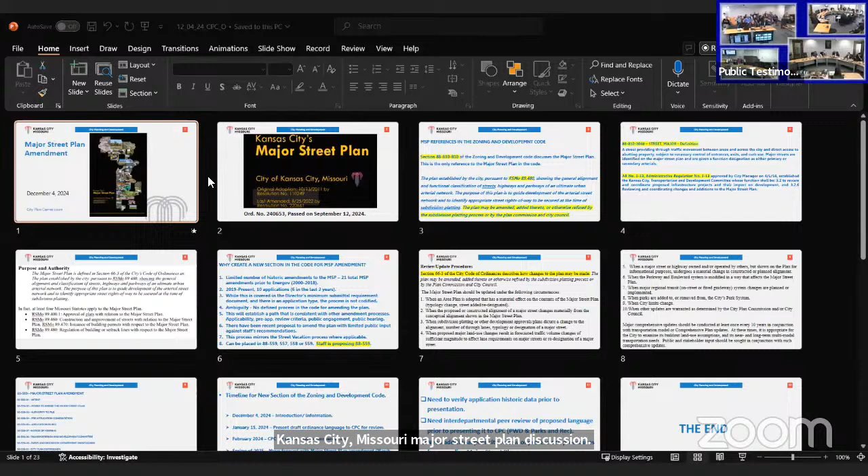Thank you, Sarah. Can you see my screen? There you go. Good morning, Mr. Chairman, members of the Plan Commission, Olafo Agbaji, City Plan and Development Department.

Over the last several years, especially since last year, we've had challenges with the major street plan amendment and various cases that come before you. And as we've stated, there's no process or procedure in the code. So today we're going to give you a quick presentation on what the city, which is DMD and City Plan and Development, wants to do to create a process and procedure for amending the major street plan.

During our prior discussion, you also remember that we had talked about revamping the major street plan, and Public Works is here to give you some information about that. I'm going to give you information on establishing a process and procedure for amending it as we move forward, and they will give you just a brief nugget on what they've been doing and where we're going with that.

So for what I do, I'll start with the first thing. The current major street plan was last amended in full back in 2011 and briefly amended last September for the deletion of Tiffany Springs Parkway. So since 2011, we are due for another amendment.

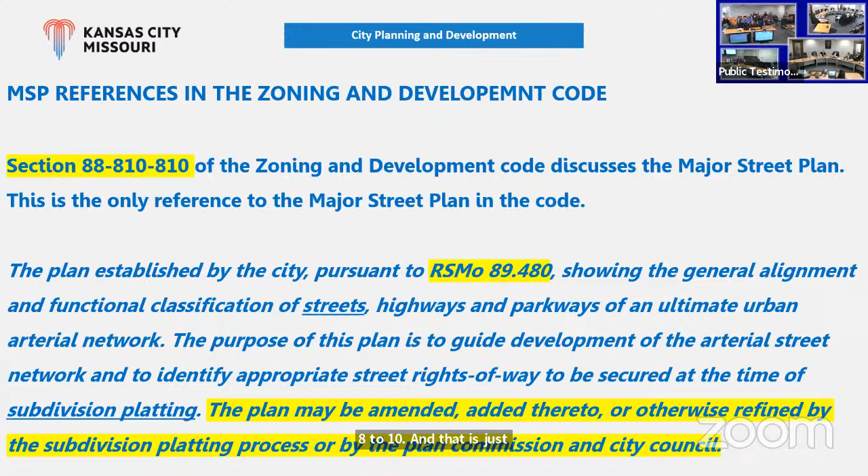Again, when I presented my prior presentation, I informed you that there is no process in the code. There's no mention. The only mention in the code about the major street plan is a reference in 88-810, and that is just referencing the major street plan, telling you that based on RSMo 89-480, you can do it.

City Plan Commission and City Council can do it. We have a definition of the major street plan in the code, and there's an administrative regulation by the city manager that requires that every major street plan goes to the Transportation and Development Committee. Those are the only policies we have that reference the major street plan.

Again, the purpose and authority that's currently in the major street plan document itself still references the same RSMo 89-480. That's the only mention of it. And then there are other state statutes that refer to the major street plan without giving us explicit direction on how to do it, when to do it, or why to do it.

Just to have a brief discussion topic, which is why we'd create a new section in the code to talk about major street plans. So over the past year, as I was doing this, I went through and checked to see how many major street plan amendments have been applied for. Prior to the compass system, I think we had a total of 21. From 2000 to 2018, we had 21 major street plan applications, and not all of them were approved. So when I come back, I'll give you the data in terms of how many were approved and how many just fell apart.

Between 2019 and today, we had 10 applications, which is after the compass system. And of those, we had 6 of them in the last 2 years, which is why we get into what we're trying to do today.

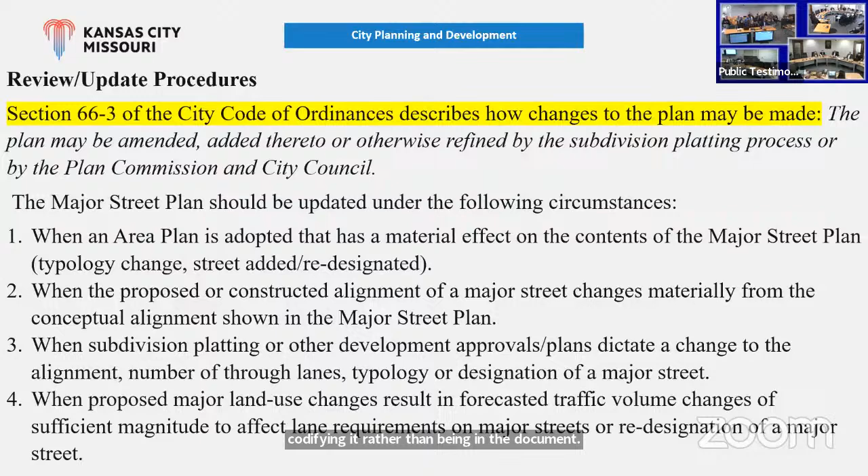Currently in the major street plan, these are some of the criteria to consider when you are trying to amend the major street plan, but it's not in the code. So when I come back, these are some of the criteria we will use within the new process, codifying it rather than it being in the document. So this will be the process we will use, and I'm not going to go through all of them. So it goes down to 10.

In the code, simply put, I'm going to be using these sections. Let me make sure I go through this. So the new section will be major street plan. We'll know what the intent of the major street plan is. We'll also define the power to amend the major street plan clearly, and the authority to file, who can file, and when they can file.

It will require pre-application consultation prior to filing. Then you have filed a major application. Notice of hearing will be required as we do with other processes. We would then refer that to the Transportation and Development Committee. We will also refer to the Parks and Rec Department if it's on the Boulevard or Parkway. After that it will come to City Plan Commission, who will then make a recommendation to the City Council, who will review and give final action.

We will also include approval criteria that will evaluate the proposed amendment prior to making our recommendation. So with that, I'm looking at a timeline for getting this moving forward.

Today's action was introducing this to you. The next action will be to bring this to you either January 15th or the first week in February. I'll present the draft language for City Plan Commission to go through. Following that, you would then come back, probably the second week in February, to review and then make a recommendation on that ordinance language to go to City Council. And then we will move forward.

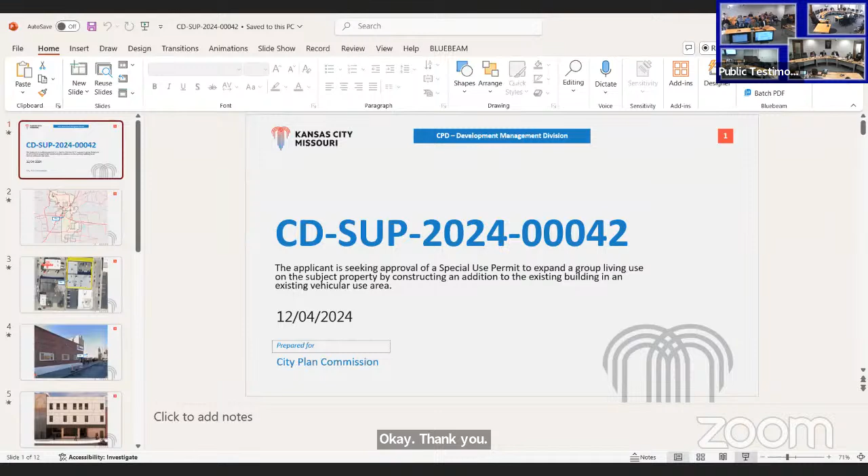Thank you. Can you hear me and see my screen all right? We can see your screen and hear you. Yes, thank you. Perfect. Thank you. Okay, Ahnna Nanoski, Development Management Division, as mentioned, this is CD SUP 2024-42, and the applicant is seeking approval of a special use permit to expand a group living use on the subject property by constructing an addition to an existing building in an existing vehicular use area.

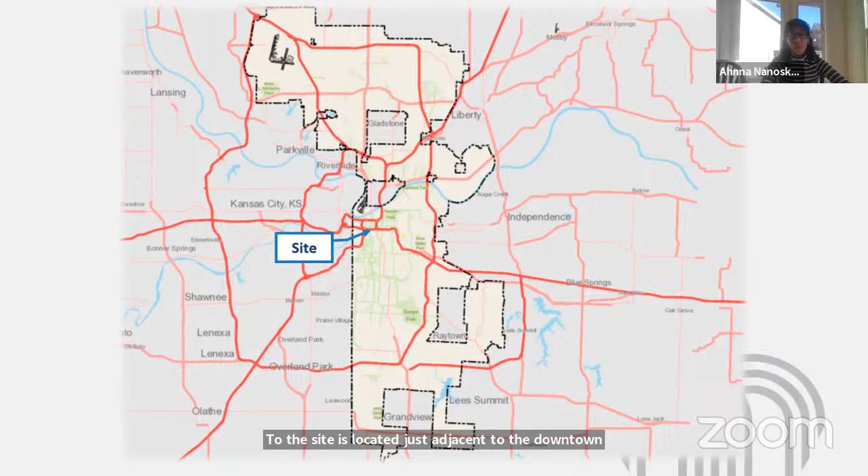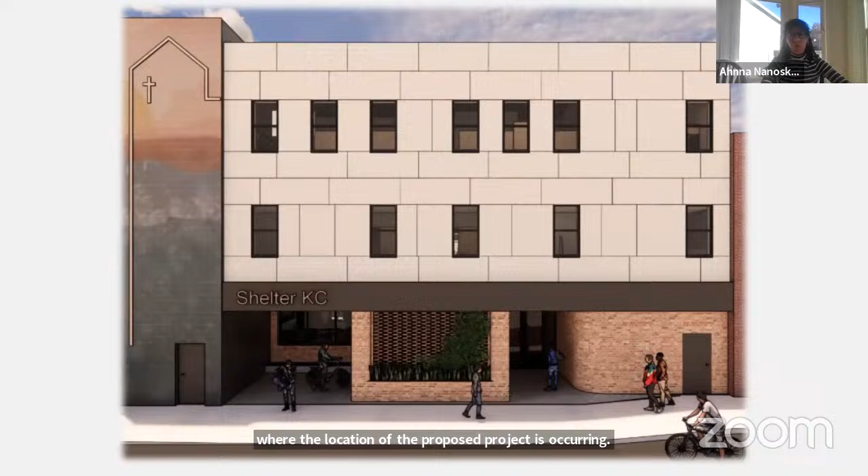We have a rendering of what the building will look like, provided by the applicant, and another look at the site plan. The existing vehicular use area will be completely filled up with this addition, which expands the group living use that currently exists in the two existing buildings to the north and south.

The review criteria associated with the special use permit is on the screen. I'm not going to go over all the items, just the three criteria that showcase city staff's recommendation. First is review criteria B: will the project be in the public interest and not have significant adverse impacts on the surrounding community?

We believe a mixture of residential uses is important for a large community like Kansas City, Missouri. Additionally, a group living use in downtown or downtown-adjacent neighborhoods, close to where there are lots of vulnerable populations, is good for those uses to be there.

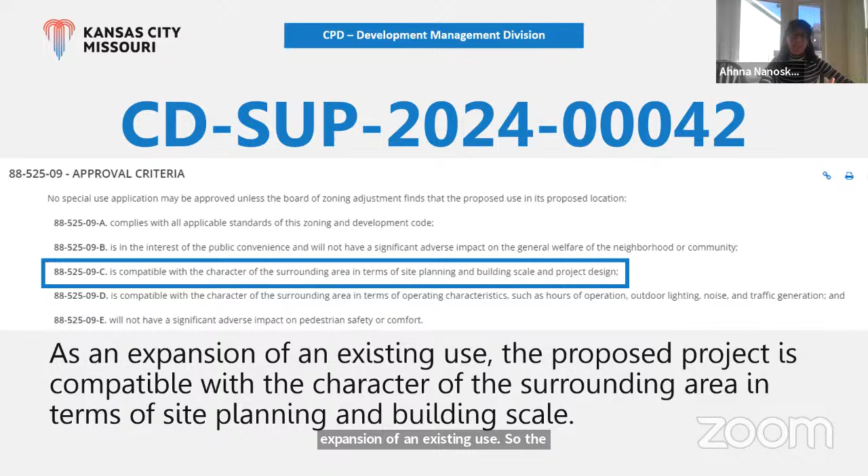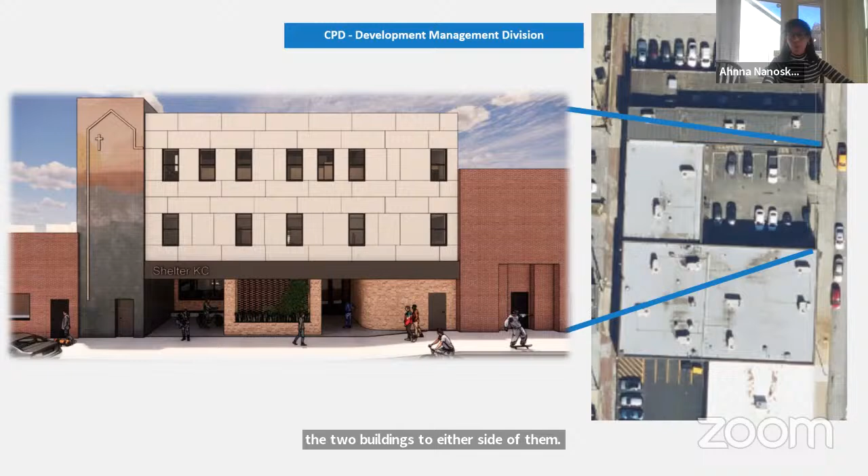Review criteria C: is the proposed project compatible with the character of the neighborhood in terms of site planning, building scale, and project design? As mentioned before, this is just an expansion of an existing use, so the proposed project is compatible with existing conditions. We see the addition in context with the two buildings on either side. They're infilling it, and the design is compatible with what is there now.

Review criteria D talks about the operational characteristics of the project and whether that is compatible with the surrounding area. Again, it's just the expansion of an existing use, so we don't believe it will substantially affect the surrounding area.

The proposal includes an addition to accommodate dwelling units that will hold around 24 additional people, along with some amenities like a small courtyard. We think that addition is minimal in terms of the scale of the project and how many additional people will be held in this addition.

So city staff recommend approval subject to condition, and condition number 5 does need to be resolved prior to the BZA review. I know the client is working with the Water Services Department currently to fix that issue. That concludes my staff report. I'll be happy to answer any questions.

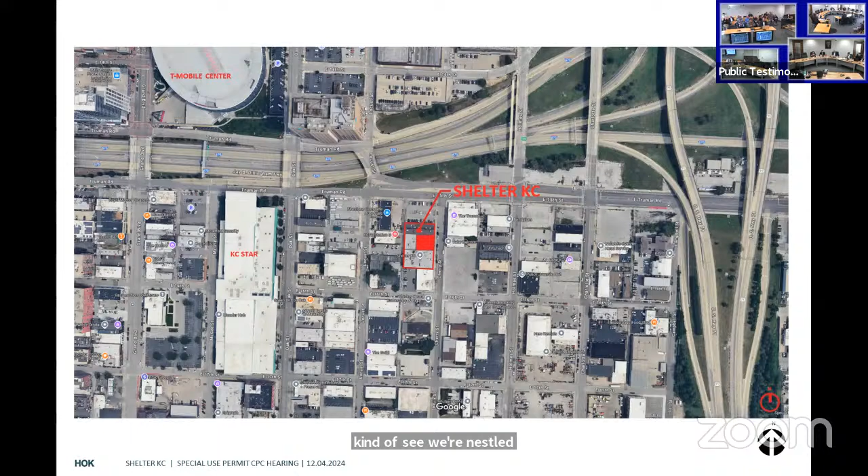Like Anna said, we're located in the East Crossroads, just south of Truman Road. We're nestled between 71, 670, and the KC Star building, right over in that area that's developing.

What we're really trying to do here is create a new front door for the Shelter KC facility that will allow us to have an upgraded set of amenity spaces that give them better tools to support their guests and staff. We want to focus on the whole person and give a restful space for the guests as they transition back into the public realm.

We've been thinking really about what are basic human rights, what makes a person well, what should a shelter provide. Those have been questions we've been asking ourselves along the way as we've been designing the project, really trying to support Shelter KC and their mission in the East Crossroads.

I'll just go through some imagery. Like Anna shared, this is the primary elevation of the building off of Cherry Street. You can see we've tried to integrate the different textures of the crossroads with matching brick and some updated paneling.

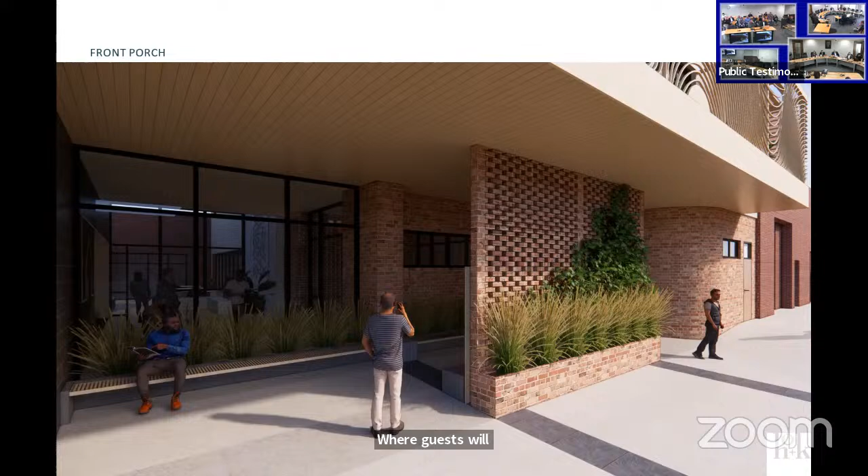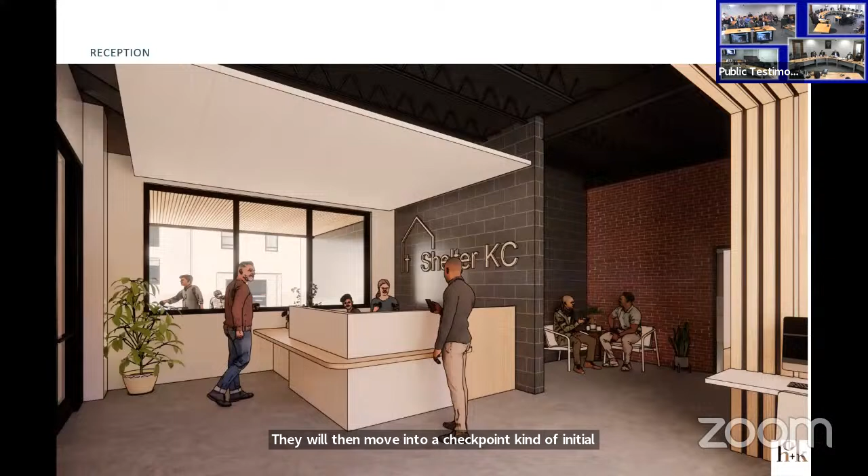Including artwork and signage in the facility to really mesh with what's going on. This is a view of the porch, which is also a controlled queuing area where guests will queue at certain hours of the day to get entered into the facility. They'll then move into a checkpoint, an initial intake and reception area that will be staffed 24/7 and have great views to the exterior with both direct windows and security cameras.

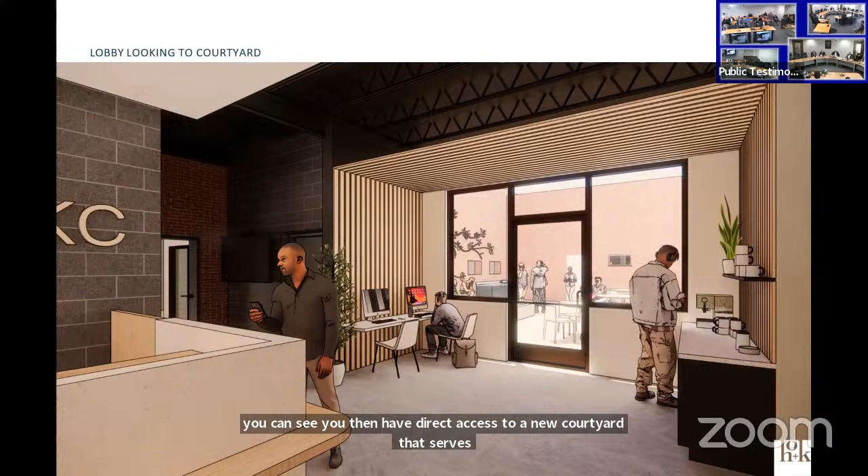You then have direct access to a new courtyard that serves the guests and staff and creates an ancillary waiting space and public use for folks in the building. And this is that space, really just meant to be a quiet rest space that could also transform for a small staff event or something like that.

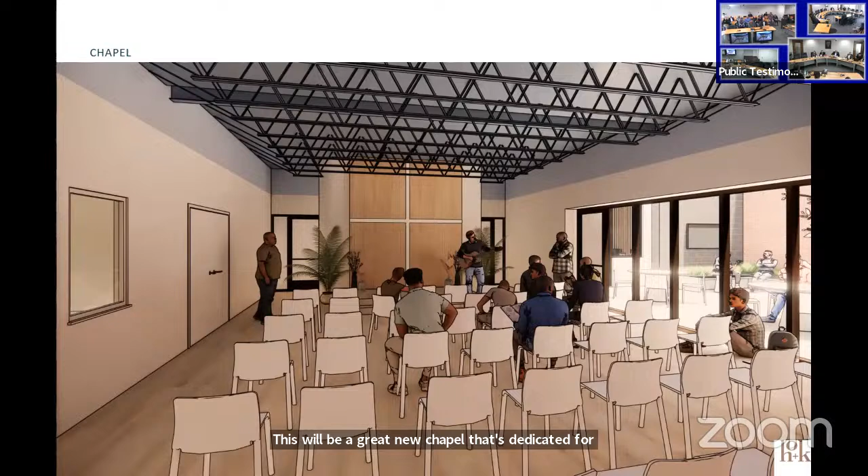Immediately behind this is the chapel, and you can see the courtyard on the right. This is a new upgrade from their current facility, which is being used more as a multi-purpose room. This will be a great new chapel dedicated for that purpose, but with the ability to flex into a larger gathering as needed. Moving upstairs, we've created a few new living room spaces that serve the guests and create dedicated restful spaces rather than having to use multi-purpose areas.

Thank you for your time.

So there's a couple of different elements of Shelter KC. One is we are not a low barrier shelter. We basically give a 14-day stay, and after that you have to agree to be working a life plan or go into a Christ-centered recovery program. This new facility, the housing on the 3rd floor, is for people in a 9-month structured recovery program.

The other piece we're really excited about is that when we did our phase 1 renovation, we lost some of our common spaces, and we haven't had enough space for classrooms, lobbies, that entrance area, our own interior place—so that when people during the night want to go out, or maybe just need to have a smoke or whatever, we need that interior space. So those are the things we're really trying to focus on.

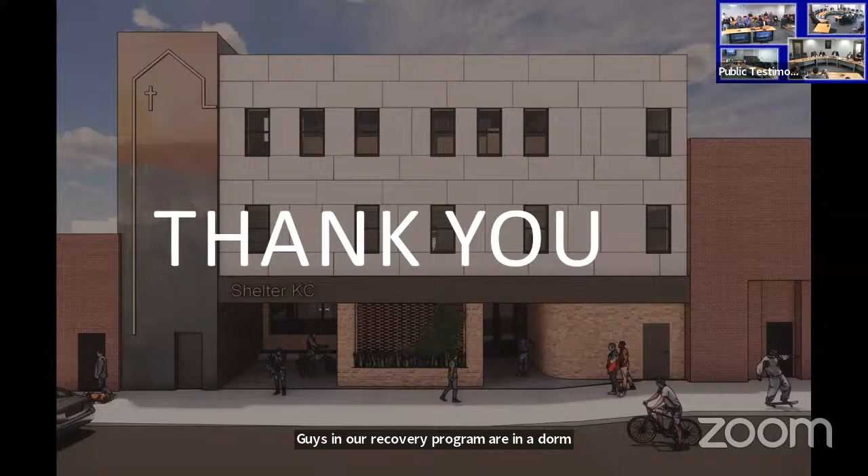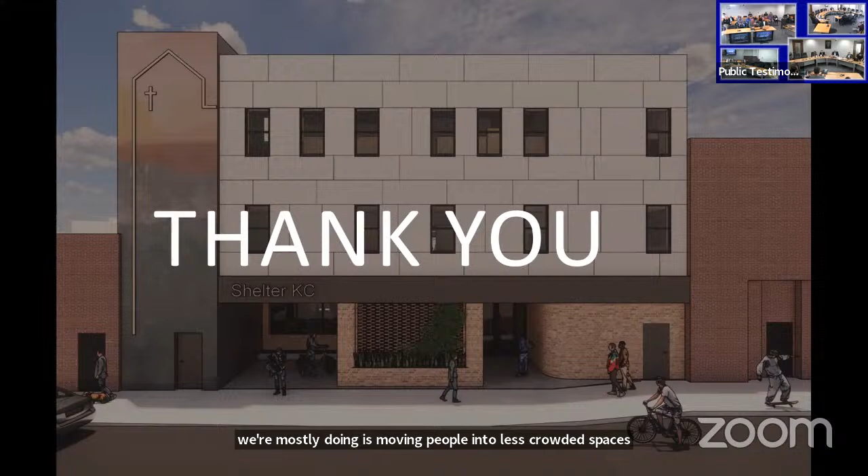Any questions from the commission? Can you talk about the capacity of the spaces that exist now and capacity with these new renovations? Yeah, we're at 124 currently and will continue to be at 124, because when we did our phase 1 renovations we moved some people into temporary spaces that'll go back. Right now our multi-purpose room is being used temporarily for housing. Guys in our recovery program are in a dorm meant for guests, and they'll move upstairs, while people in overflow will move into that space. So it's not adding any more beds to our existing space—what we're mostly doing is moving people into less crowded spaces and creating much more classroom, community space, and office space.

And do you provide services to people not staying overnight?

So pretty much you have folks staying with us. The 14-day guest program, those folks leave during the daytime and come back every evening. After that 14 days, you have to be working a plan. One of the things is that 60 to 70% of our overall clients are employed. Some are employed when they come, but the majority after those 14 days, we're working on getting them employment. So most people are working jobs, and the nighttime is when we're the busiest, because that's when everybody's in and we're working with people. In the daytime, most people are working.

I got a question for Ana. The special use permit, is that only for this new piece, or does it start the clock on the existing pieces and include this new piece?

It is only for this new piece. The reason why Nick mentioned the amendment to the special use permit is because when the use was first established, it was just allowed by right. But now in this zoning code, if it was to be established, it would require a special use permit. So anything beyond that existing nonconformity triggers the SUP.

What length of time is tied to this SUP? This one is tied to 5 years. Okay.

All right, any other questions for the applicant? All right, seeing none, let's open it up for public testimony.

Good morning, Mr. Chair, members of the Plan Commission. Jerry Riffle, Lathrop GPM, 2345 Grand, Kansas City, Missouri. To my right is Matt Abbott, president and CEO of Abbott Properties. Abbott Properties is a neighbor in many ways—it has developed and redeveloped many properties in the area, its national headquarters is in the area, and it leases properties to a number of neighbors. We have provided correspondence to the applicant, which we will make part of the record, but what we're requesting is simply that this be held 2 weeks so we can engage in 2 major activities: first, negotiate a neighborhood agreement, and second, explore their business and social plans.

According to the staff report, this is going to result in 24 additional residents in the area. As you know, there are specific requirements for a special use permit, and those requirements are well stated in case law for very good rational reasons. At the BZA hearing, they will have to show it is in the interest, as staff indicated, of the public convenience, and will not have a significant adverse impact on the general welfare of the neighborhood or community. In other words, it needs to be consistent with development patterns, public safety, and uses in the area, and compatible with the character of the surrounding area in terms of site planning, building scale, and project design. We want to be a good neighbor, and we want them to be a good neighbor. We think a 2-week hold to make sure we understand that is very reasonable.

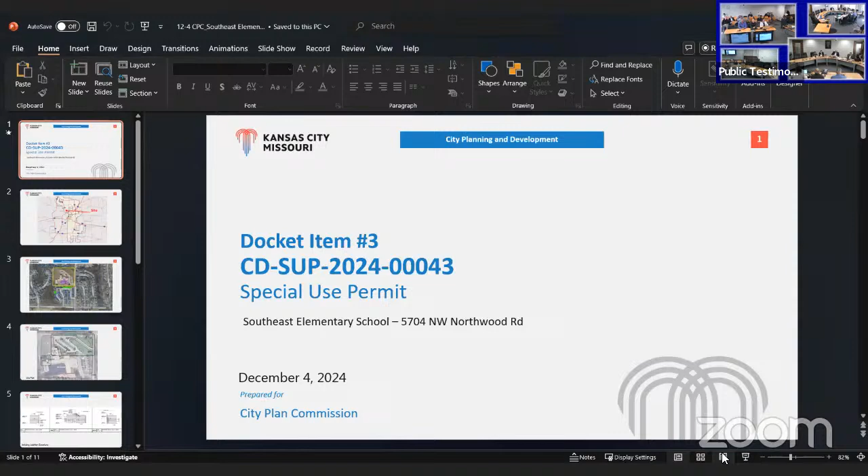The site plan reviewed by staff, as provided by the applicant, shows two areas of change to the existing school. The largest change will be the addition of a vehicular drive to the existing parking lot, which will be reconfigured as a parent drop-off and pickup area, separate from the bus drop-off and pickup. There will also be a building addition of just over 1,000 square feet on the west side of the building.

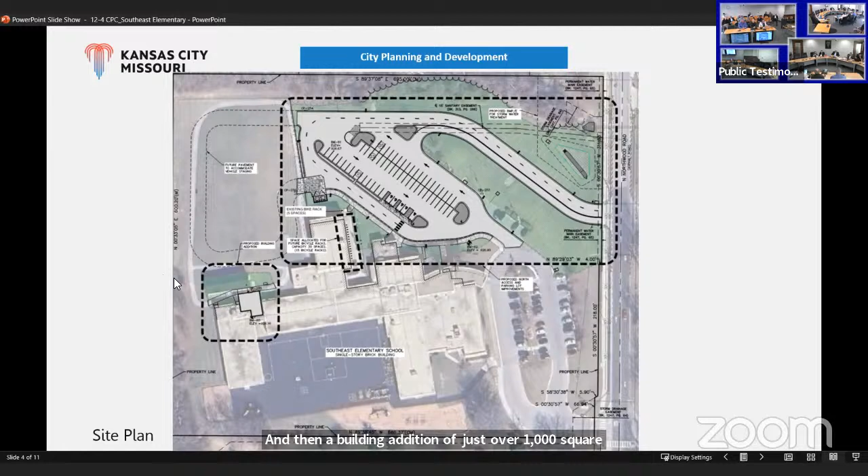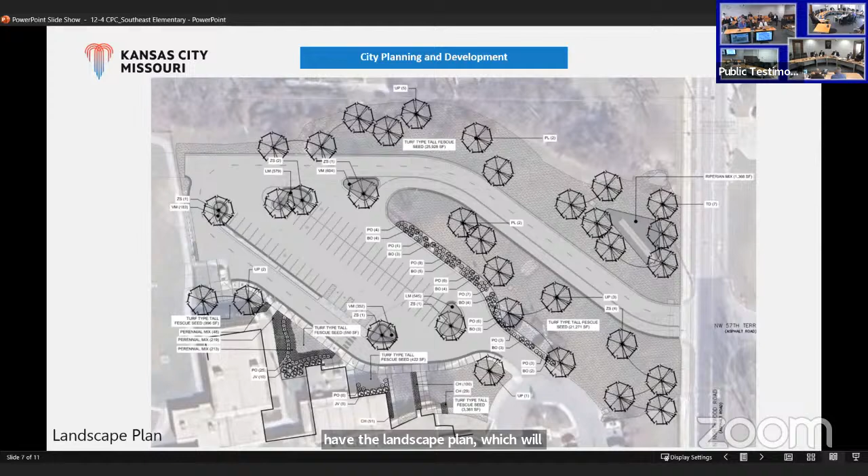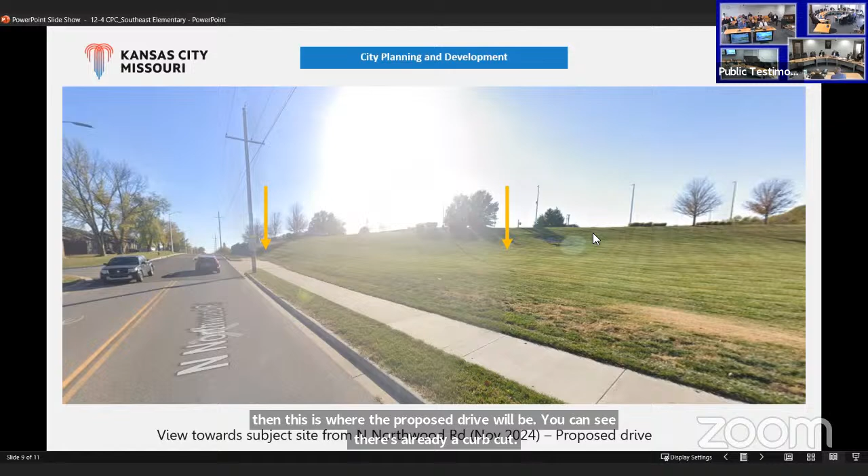We also have the landscape plan, which will provide screening of the parking area, and a few street views of the site. This is the existing drive located at the southern portion of the site, and this is where the proposed drive will be. You can see there's already a curb cut here, and it will wind up this hill to get to the parking area. Here's another view of the site looking straight on.

Staff is recommending approval subject to conditions. One condition will be for the applicant to seek a variance from the Board of Zoning Adjustment for the number of required bicycle parking spaces. I can take any questions.

Any questions from the commission to city staff? No. Okay, all right, welcome the applicant then.

Good morning. David Wood with Kaw Valley Engineering, civil engineer on the project. With me is Mr. Jim Rich with the Park Hill School District. I don't have a whole lot to add to Genevieve's presentation—she illustrated what we intend to do here and the reasons for it, to improve traffic circulation on the campus. We've reviewed the conditions of the project; they're acceptable for what we're trying to do, and we will request the variance for the bike parking.

Just to clarify, the existing school already has bike parking today. The school district identified the needs they have for bike parking, so we're working with what they actually need versus what the code stipulates. Happy to address any questions.

Any thoughts on when the future loop will be constructed? At the moment it's kind of an as-needed improvement. The pickup location isn't changing; the difference is that today you have to enter on the south side of campus and loop through the existing parking lot. The proposed change separates the buses and cars to opposite sides of campus and allows us to double stack the inbound lanes. So we're matching the capacity on site today, but this gives us the ability to increase capacity in the future if necessary, due to student growth or changes in busing policies that seem to impact school operations yearly.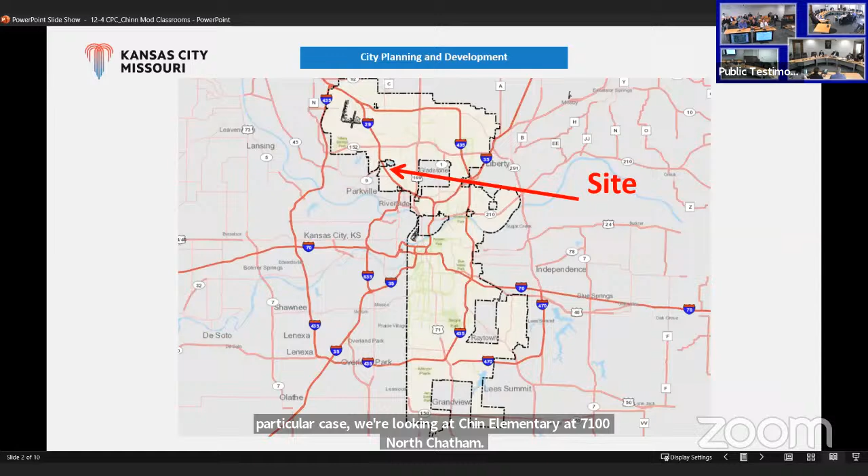Docket item number 4 will probably look very familiar. This is hopefully the last of the modular buildings before completion of the new elementary school in the Park Hill School District. For this case, we're looking at Chinn Elementary at 7100 North Chatham, located in the Northland in Park Hill School District.

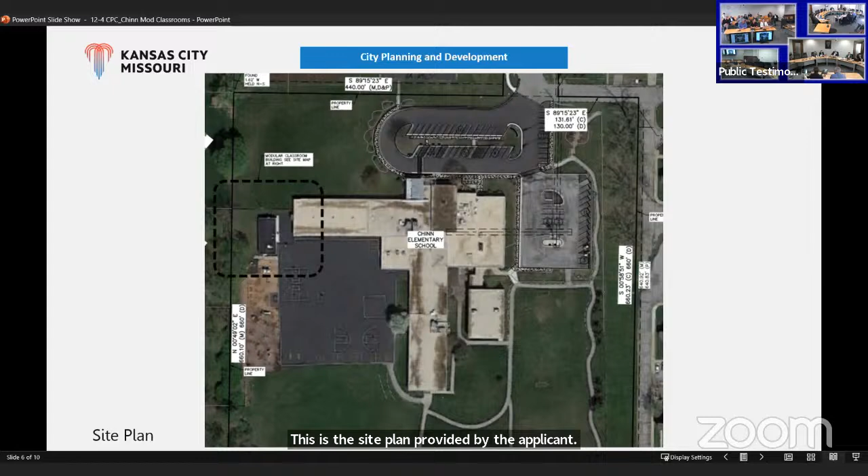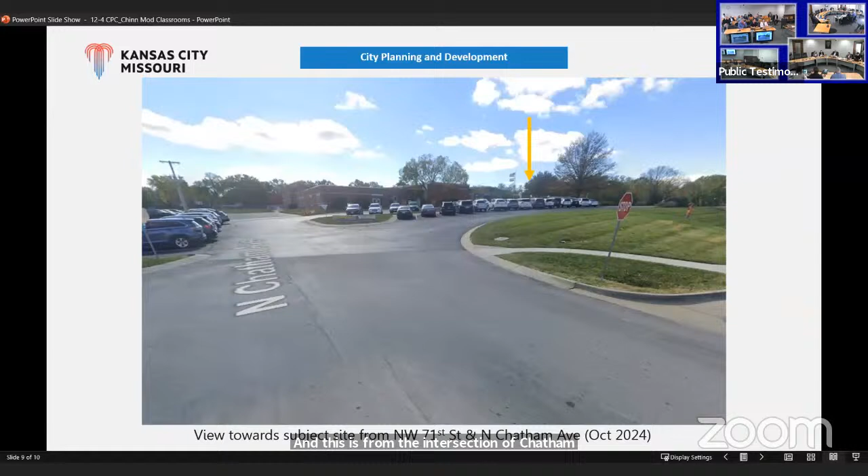So it's already existing, the modular building is? Okay. Any questions for city staff?

All right, let's welcome the applicant then. Good morning, Ryan Walters, Hollis Miller Architects. I don't really have much more to add here other than when Angeline Washington is complete, I guess it would be this coming summer, this building is slated to be removed, and what we're really trying to do is comply fully with all processes and tracking mechanisms that the city would like for these sorts of buildings. Any questions for the applicant?

All right, let's open it up for public testimony then. If there's anybody out there that would like to speak regarding docket item number 4, please come forward or raise your hand using the Zoom feature and you will be called upon. There are no hands raised online. Okay, so we'll close public testimony then. Anything else to add at this time?

Okay, we'll close testimony and I'll take a motion, please. Well, thanks for coming in. Chair Crowley, I move to approve docket item number 4 with its single condition. Second. Motion and a second for approval of docket item number 4. Margaret, can you take roll call on that motion, please?

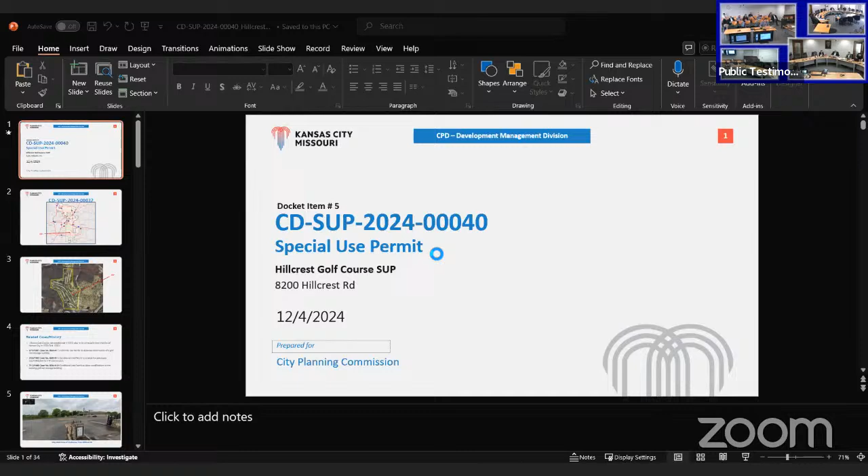Good morning, board. I'm Alec Gustafson, Development Management Division. This is docket item number 5, CD SUP 2024-40. It's for the Hillcrest Golf Course SUP. The site is located just south of Swope Park, west of Raytown. It's zoned R7.5, and it's an old golf course.

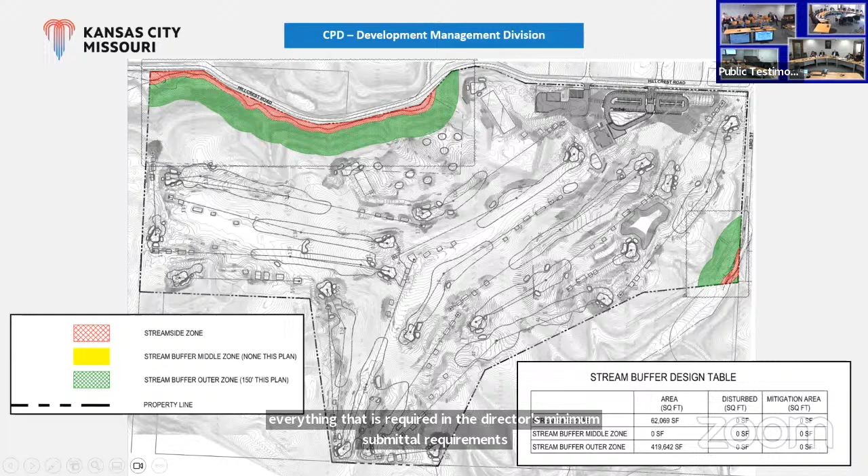So they gave me a plethora of different plans, everything that is required in the director's minimum submittal requirements. We have the stream buffer, tree preservation plan, which did not require tree mitigation, the continuous tree canopy to be preserved, and undisturbed stream buffers.

This is the new layout of the actual 18-hole golf course. You can get a better view in your staff report if you choose to find out what the whole layout is, if you ever plan to go there.

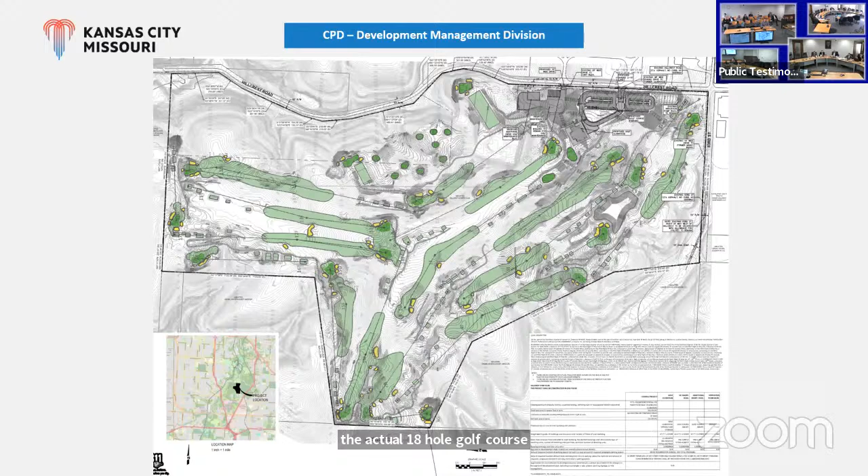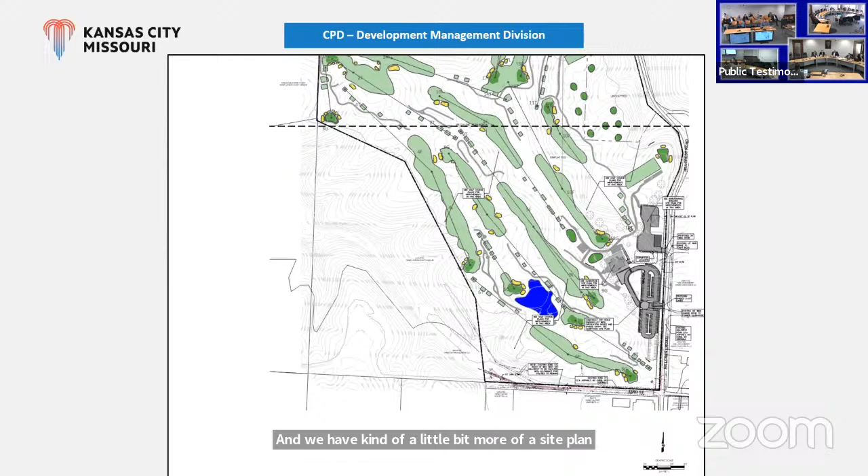And we have kind of a little bit more of a site plan with added parking and one maintenance building to remain. This is just more of their site layout.

They have one additional maintenance building that is being proposed to be built, the north maintenance building, and then the southern maintenance building along Hillcrest Road is existing and is intended to remain.

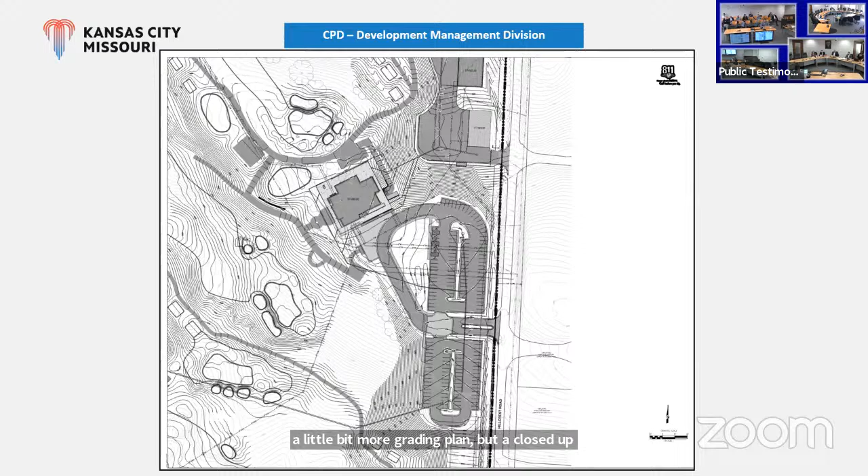And then here's the beginning of their landscape plan. Plenty of vehicular screening along Hillcrest Road, which is what we require. More landscape, just a zoomed in view telling you what exactly we have here on the site.

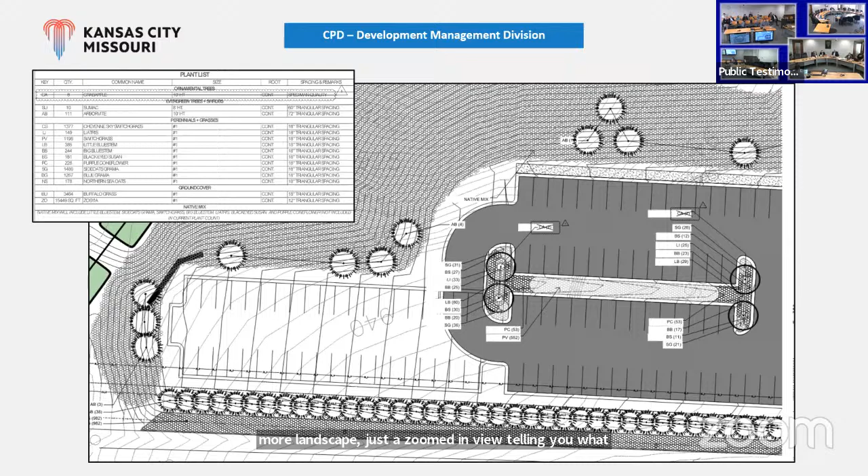And then here's their initial layout. So they have golf cart storage on the lowest level of the clubhouse, along with storage, let's see, coolers, offices, restrooms. This is the first floor.

And this would be the roof with solar panels on top. Here are the elevations, kind of sticking to the same similar design, but kind of an upgrade to what they had previously.

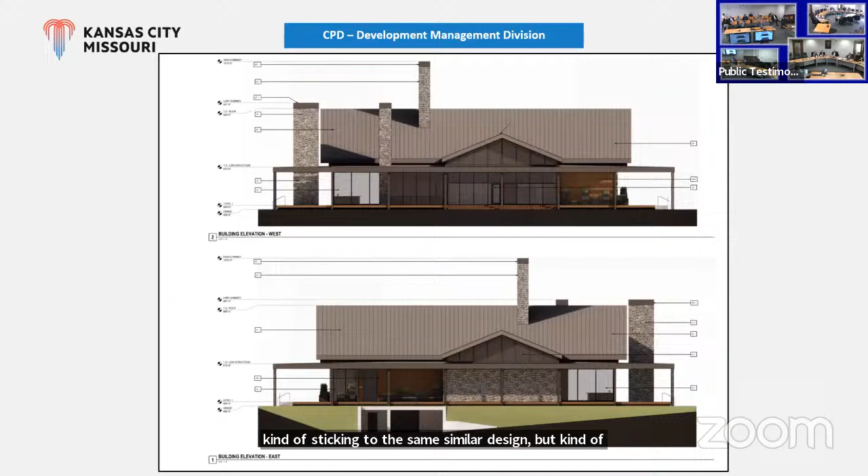And then more elevations and their outdoor lighting plan.

So the specific review criteria, I just wanted to highlight that there may be a need for a variance to the position of the accessory buildings on the subject site. And then there was conversation in the hearing, or in the process leading up to this hearing, about public sidewalks.

Code 88-450-03A basically lets us know that we can only request sidewalks when it's any platted lot where sidewalks have not been constructed. This is not, they're not proposing a new plat. This is just a site plan. So the Development Management Division cannot make a suggestion for sidewalks.

It would be up to any sort of discussion as pertains to sidewalks to be something that the City Planning Commission or City Council would make a motion on, but this case will not go to City Council. So it would be up to you guys. And I just am letting you know that this will hopefully be a discussion topic.

To move on to talking about the variance that I discussed in the specific review criteria: accessory buildings and structures are prohibited in front and street side yards, meaning they may not be closer to the street than the principal building. And as you can see in the site plan, these are just me defining what side and front property line is, but essentially the proposed maintenance buildings are closer to Hillcrest Road, which is the side street, than the primary structure.

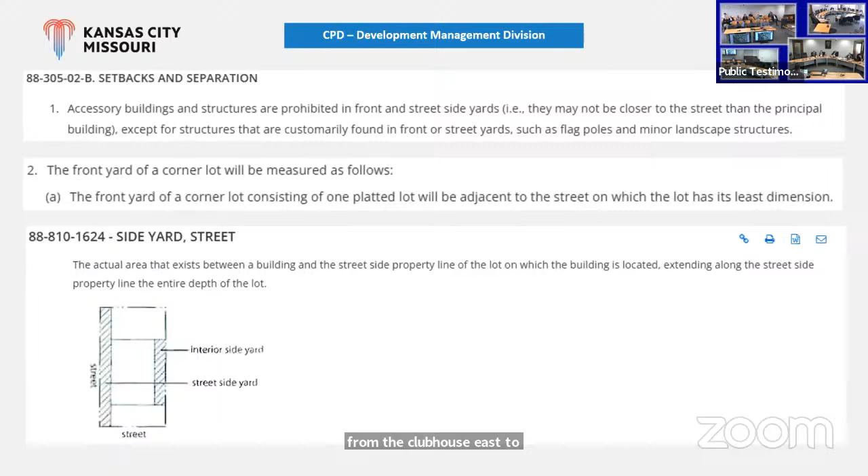So, if we're looking at the definitions for front yard and side yard, the front yard of a corner lot consisting of one platted lot will be adjacent to the street on which the lot has its least dimension. That's just a code way of saying that the shortest street frontage is the front yard property line, meaning that from the clubhouse south to East 83rd Street would be the front yard, making from the clubhouse east to Hillcrest Road the side yard, which is where we can talk about the fact that the buildings are in the street side yard. That would be the need for the variance.

And any other conversation as it pertains to sidewalks, there are not any conditions in the plan conditions that relate to the need for sidewalks. So staff is recommending approval with conditions. And that concludes my presentation.

I'm happy to answer any questions.

Okay, I'm not sure I understood the sidewalk comment. If you're looking at the site plan, you're saying they need more sidewalks, or? No, that is not what I'm saying. I'm saying that the Development Management Division does not really have necessarily a stance on the sidewalks.

I just know that it was something that was talked about quite extensively in DRC and moving forward. It's not required here. So you're talking more along the street frontage. Right, it would not be required as far as development management is concerned, as far as zoning is concerned. Okay, so it's not required as part of development management? Okay.

Then, where does this go next? BZA. Doesn't go to council? Okay, staff report says council, that's why I wasn't sure. Oh, yeah, yep, that's a typo on my end. Cool.

Any other questions for the city staff?

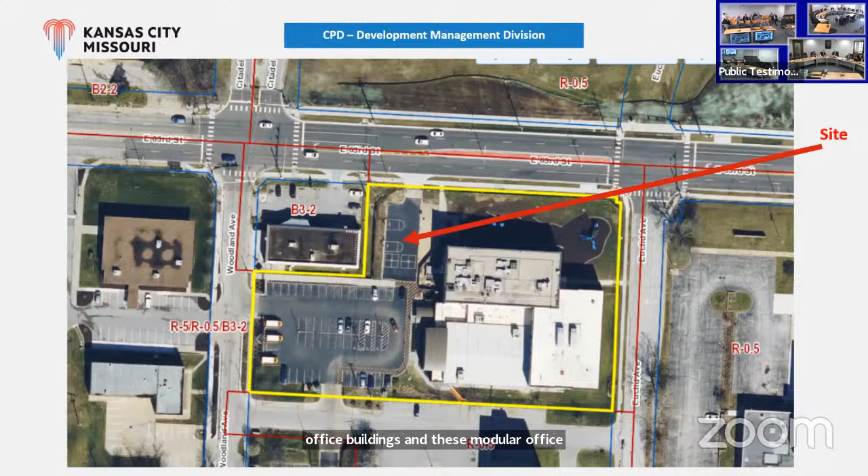This is just a little bit on controlling related cases. This is a permit that has not been approved, pending this special use permit. So I'll go through a little bit of the case history just to make this make a little more sense.

On July 5th, 2024, a pre-application meeting was held informing the applicant that a special use permit would be needed to place the modular office buildings on site. On the 30th of July, that same permit, CRBC 2024-40103, was submitted for review and failed because of the pending special use permit. Sometime in August or September, the modular buildings were placed without this special use permit and without the approval of that building permit.

And then they submitted two more times with that same permit number, which was then subsequently failed because they were pending this special use permit.

October 28th, this special use permit was then applied for, beginning the cycle 12.1, getting us here to this hearing. And then the permit case was then submitted a 4th time and failed because they're still pending this special use permit before you today.

This was the view of Brookside Charter School in September 2022 from Google Street View, and this is September 2024 with the modular buildings already placed.

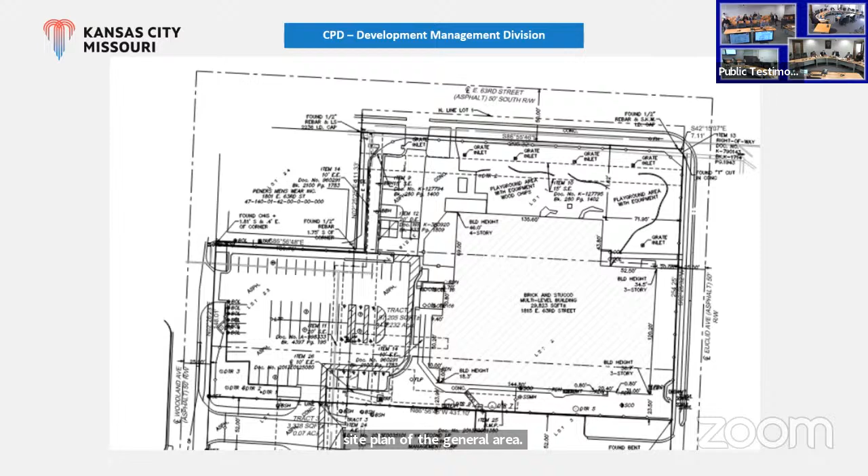This is just the site plan of the general area, the parking and the basketball court, playground area in the school. The site plans in the staff report go into detail about the actual interior design work. I left that out of the presentation because we're here to talk about the modular office buildings.

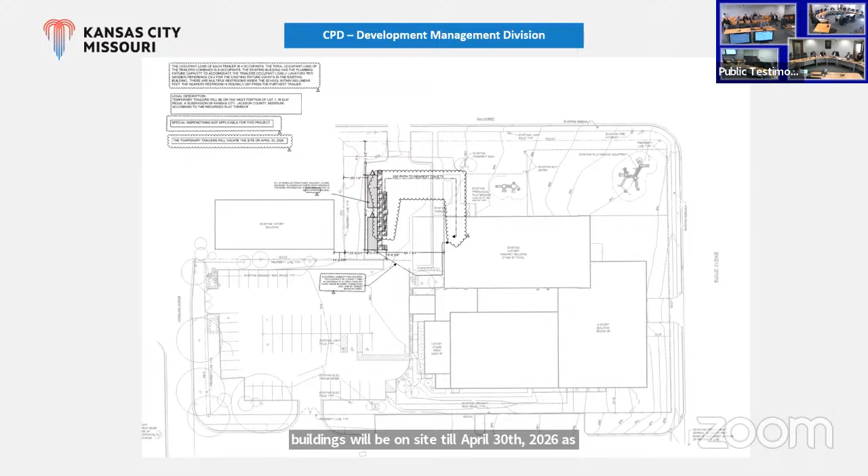So this is the site plan showing where the modular office buildings are to be. There's a 200-foot path to the nearest restrooms. The occupant load of each trailer is 4 occupants, that's all they intend to have in there. The office buildings will be on site until April 30th, 2026, as the interior design work is going on inside the school. Just standard modular office building elevations.

Just their layouts of the modular buildings, footings, and these are the ramps leading up to the modular office buildings.

The only specific review criteria that I felt was important to highlight here is that the permit would be approved for 2 years, pending the BZA's approval. So that concludes my staff report, and we're recommending approval with conditions.

Okay, any questions for city staff? I have a comment, slash question. Having seen a couple of these recently, I would love to, as a commission, recommend to council a way to make these modular buildings for schools something that is done administratively, if possible.

Agree. Maybe difficult. We can write that down and talk to the director next time we have a meeting, something like that.

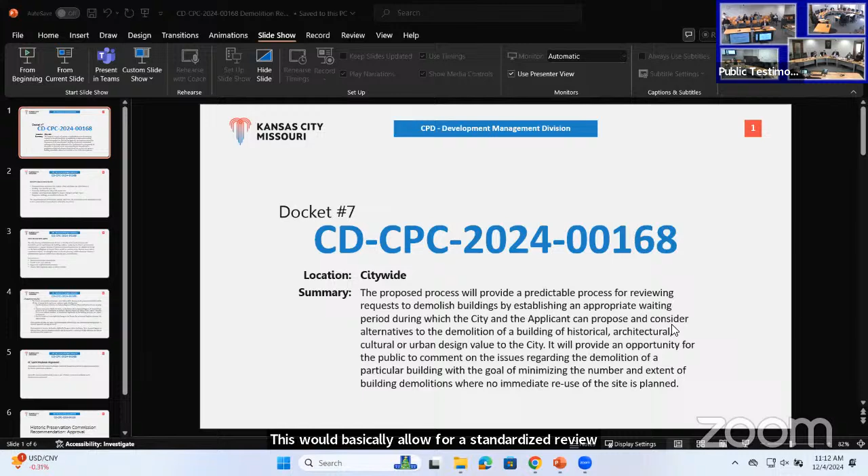Generally, we outlined three processes. We did allow for some general exemptions from demolition review. One, for local listing, there's already a demolition review process, so that would follow our standard process. Buildings less than 50 years old are exempt — the reason 50 years was chosen is that it's the National Register of Historic Places criteria.

when you start looking at whether a building meets the criteria to be historic. Accessory buildings less than 200 square feet are exempt, since we don't require a demolition permit for those anyway. Sometimes buildings have formal determinations from the State Historic Preservation Office. If that determination is less than 4 years old and says it's not eligible, they would be exempt also. And we'd also exempt dangerous buildings. So those would not actually be going through the demolition review process.

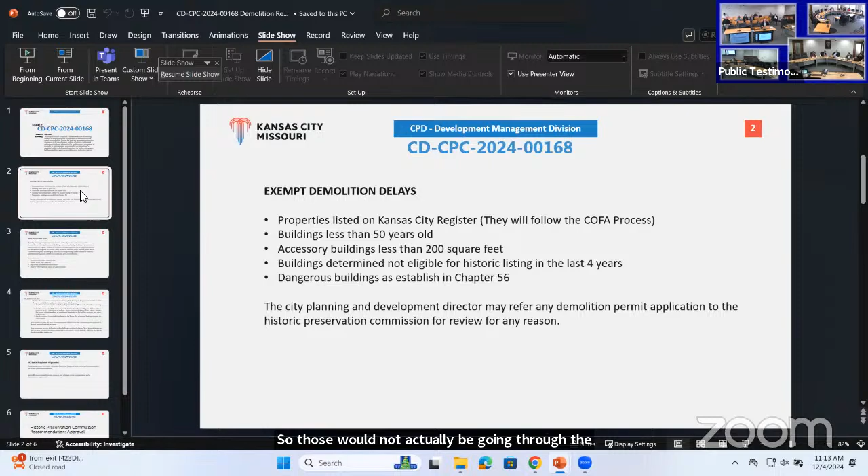The next type of process is basically a staff review process. This is more of an administrative process, but we do give notice to the commission and to the neighborhood association that staff would be recommending approval of a demolition without any review. These would basically be properties that staff felt do not meet the criteria for historic listing. That way, we would not have the docket of the Preservation Commission filled up with lots of properties that actually would not meet the criteria.

And then the last one: if staff feels the property would be eligible for listing, it would be presented to the Historic Preservation Commission on our regular monthly docket. Basically, they have up to 45 days to have it reviewed on the docket. And then if the commission finds it's eligible for listing or is already listed on the National Register of Historic Places, the commission can delay it for another 45 days. So the max delay would be 90 days from application.

And really, this is just to allow a point for the public and the commission to discuss with the property owner future plans and if there's any other options. In terms of the process, we did do the standard public engagement process. We did receive a few letters of support that we attached on the back of the staff report from the public engagement, and no opposition at this point. I'm open for your questions.

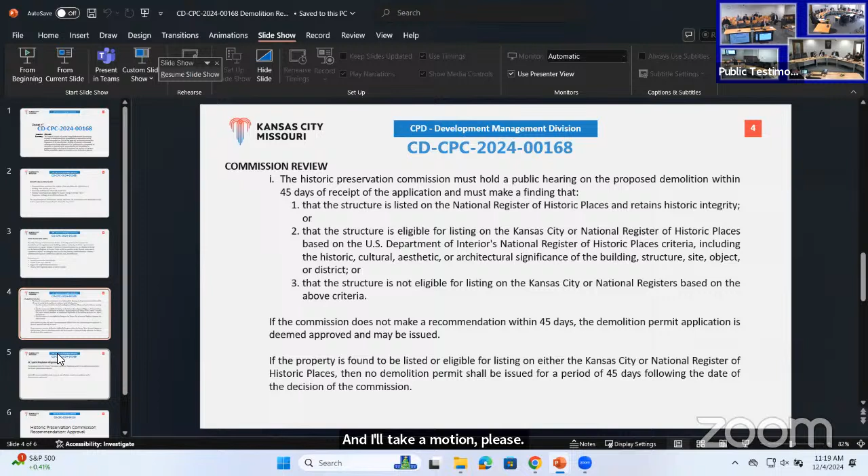All right, with that, we'll close testimony and I'll take a motion, please. Chair Crowell, I move to approve docket item number 7. Second. I have a motion and a second for approval of docket item number 7. Margaret, can you take a roll call on that motion, please?

Beasley, aye. Crowell, aye. Enders, aye. Hasek, aye. Lynch, aye. Padilla, aye. All right, thank you. Motion passes.

All right, with that, let's move on to docket item number 9. 9.1, case CD CPC 2024-162, a request to approve an amendment to the Midtown Plaza area plan from residential low density to mixed-use neighborhood on about 0.16 acres, generally located on East 34th Street between Gillham Road and Holmes Street. And 9.2 is case CD CPC 2024-161, a request to approve a rezoning without plan from District R 1.5 to District B 1-1 on about 0.16 acres, generally located on East 34th Street between Gillham Road and Holmes Street.

All right, good morning, Larissa Chambi, City Planning and Development. As was stated, this is docket item 9.1 and 9.2, and I can share my screen. All right, so the area plan amendment and rezoning without plan is located at 608 East 34th Street.

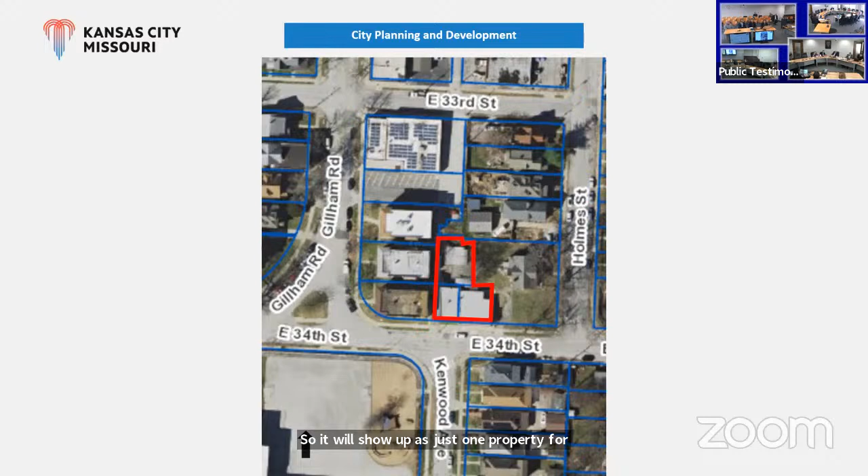This is the general location of the subject property within Kansas City, Missouri. And as you can see from this map, there are 3 properties. Those have been combined at the request of the city, so it will show up as just one property for the future projects. The current zoning is R-1.5, and the applicant is proposing to rezone the property to B1-1. There's a B4-5 just to the north, and then residential surrounding the rest of the site.

The Midtown Plaza area plan also lists this as residential low density, and the applicant is proposing to amend the area plan to mixed use neighborhood. You can see that mixed use neighborhood just to the north of the site. There is the George B. Logan Elementary School, which is the Academy Lafayette, just to the south.

The applicant did provide plans for the proposed structure. However, since this is an area plan amendment and a rezoning without plans, staff did not review those plans. The applicant will still have to come through and get city approval for those plans in the future.

There's a few criteria for the rezoning, and I won't go through all of them. However, I did want to just mention E through G. So E, suitability of the subject property for the use it has been restricted to under the zoning regulations.

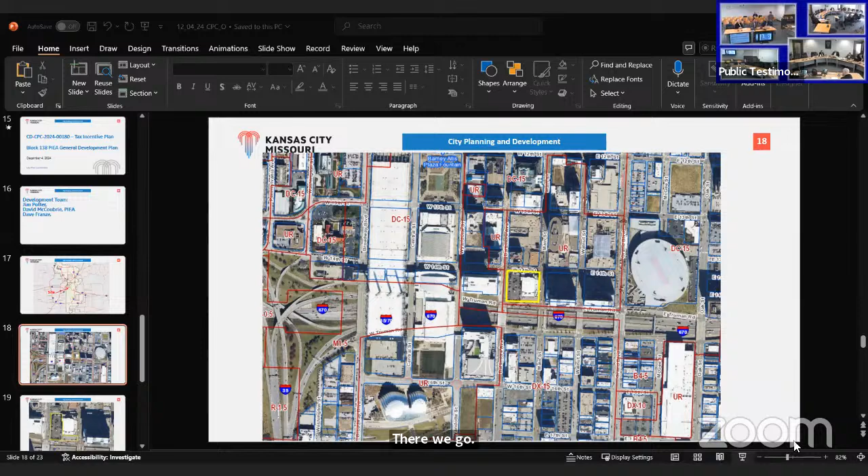There we go. It's not playing. It's a 5 minute — no, 2-minute presentation. Click on that. PowerPoint. Close out of this. Go back into that. It's gonna work, I promise. We know. Have full faith. There we go. Go to settings. I got it. Yep.

Would you like me to introduce our team while he's doing that, or are you ready? No, we're good. Go. Give it a test. Click on this. All right, I just used that arrow. Okay.

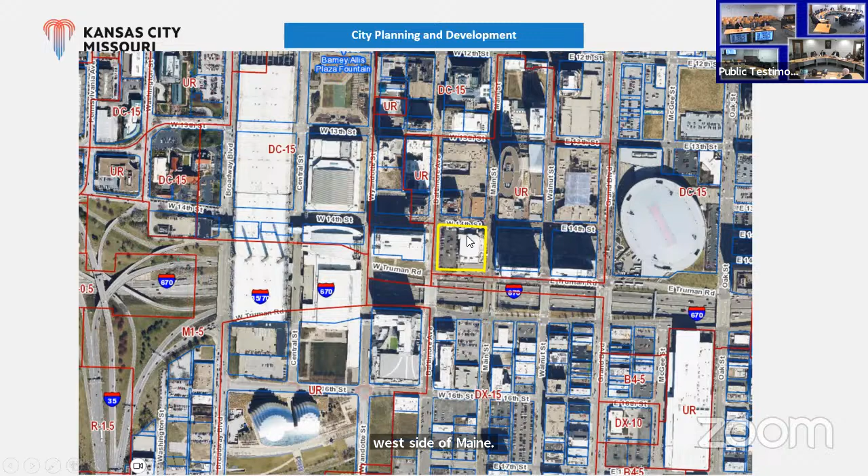Again, project location is just on the downtown loop, on the north side of 670, west side of Main, east side of Baltimore, and south of 14th Street. Specific location is just the area on the west side of the B&B Main Street Theater. The applicant is seeking approval of the Block 138 PIEA General Development Plan and to declare the area blighted and insanitary and in need of rehabilitation pursuant to Missouri PIEA Law 100.300. The overall site is 0.84 acres. It's currently zoned UR, so there's no need for rezoning for this site.

This is the original, or controlling, ordinance for this site, passed back in August 2004, which rezoned pretty much the Power and Light District from District UR and C to District UR, and approved the development plan, and also the UR plan was approved. There are multiple vertical parcels on this lot, with the city owning the primary ground. So there are underground parcels and above ground parcels, and then another set which were condominium units, which sit on the theater itself.

The block currently houses the theater with just parking around it. To the north of the site is the President Hotel and mixed-use commercial. To the east is 3 Light apartment building, and to the west is the new office building, and south is the South Loop.

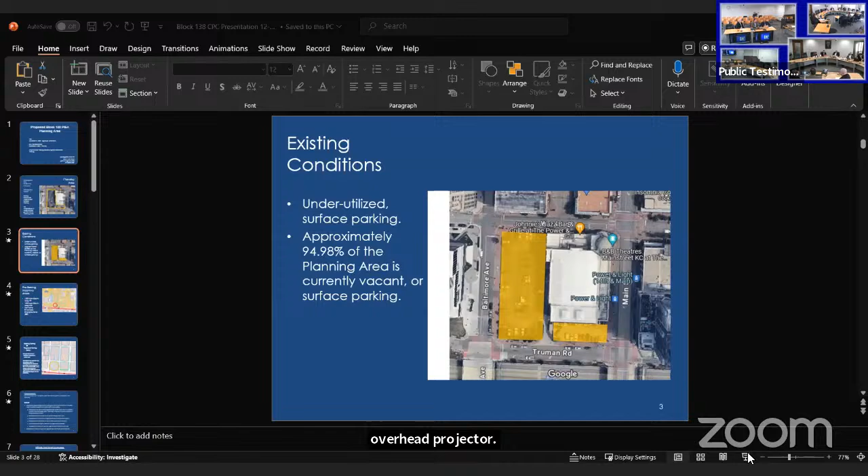Overhead projector, this time, yeah. There we go. Works, yep.

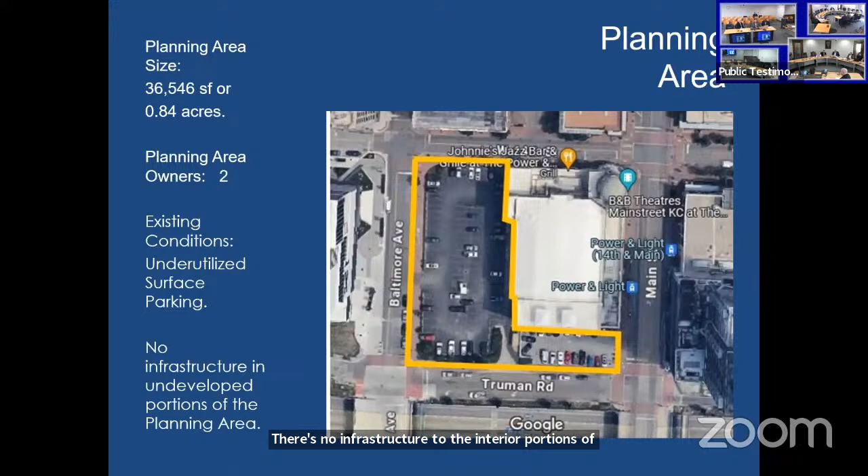Existing conditions - this is an underutilized surface parking lot. It's very rarely used, mostly on events related to the theater or other downtown events. There's no infrastructure to the interior portions of this parking lot. We do have utilities available to the perimeter, but obviously nothing that supports vertical development. Approximately 95% of it is underutilized or vacant surface parking.

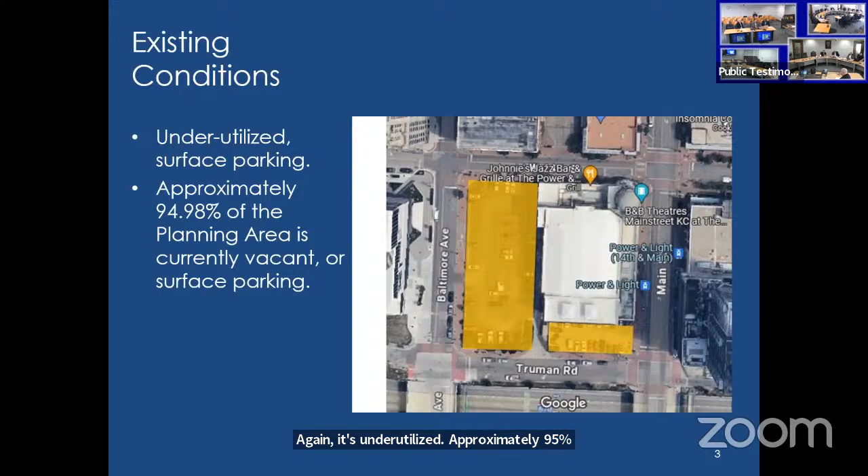This plan area does lie within pre-existing areas which have previously been declared blighted through the city - namely the 1200 South Main, or 1200 Main South Loop TIF, 1200 Main South Loop CID, as well as the Northland Enhanced Enterprise Zone.

Olafu mentioned existing zoning as UR. We don't seek any deviations from that. Design guidelines are through the Greater Downtown Area Plan. Standard PIA benefits will be available, but as David mentioned, we anticipate the incentive package contemplated in the 13th Amendment of the Master Development Agreement between the city and the developer will be honored. That amendment has previously been approved through City Council, and as such, they recommended using the PIA to facilitate that agreement.

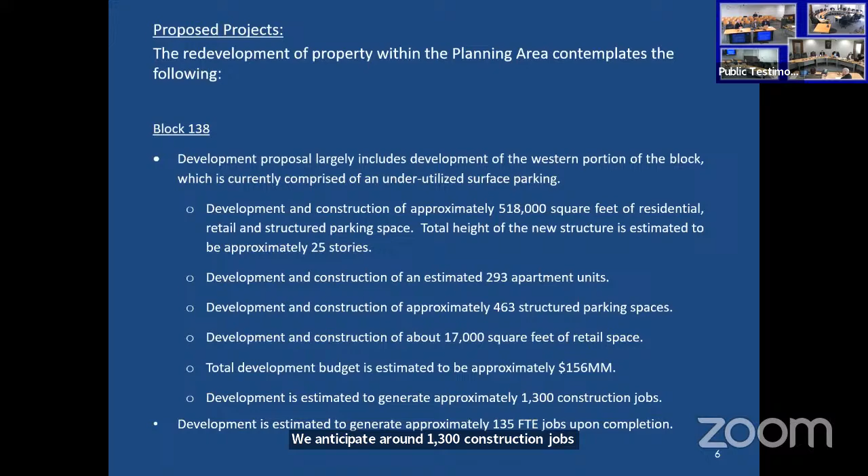Proposed project development includes development of the entire western portion of the block. We're looking at approximately 518,000 square feet of residential, retail, structured parking. Anticipated new height of the structure is approximately 25 stories. This contemplates construction of 293 apartment units, 463 structured parking spaces, and 17,000 square feet of retail space. Total project budget is $156 million. We anticipate around 1,300 construction jobs, as well as 135 full-time positions once the building is placed in service.

There are some issues in this particular block. It looks like a surface parking lot, but based on our soil borings and geotech analysis, it appears there's a large amount of construction debris on site, which will require deeper footing foundations than normally required. Soils contain a mix of sand, gravel, building fragments, brick, and concrete.

Due to the urban nature of this site, we have additional issues to deal with. This will require a specialized tower crane due to adjacent building proximity. We're going to have to adjust hours due to the downtown nature of this, and we'll have sidewalk and street protection, plus adjusted hours due to the streetcar line to the east. We also have a lack of laydown areas due to its urban nature, so materials will need to be scheduled.

Just a quick refresher, in order to approve a PIA plan, you have to have a finding that the area is either blighted, insanitary, or undeveloped industrial area. In this case, we are looking at the undeveloped industrial area finding. That definition is outlined in section 100.310, subsection 18 of the state statute.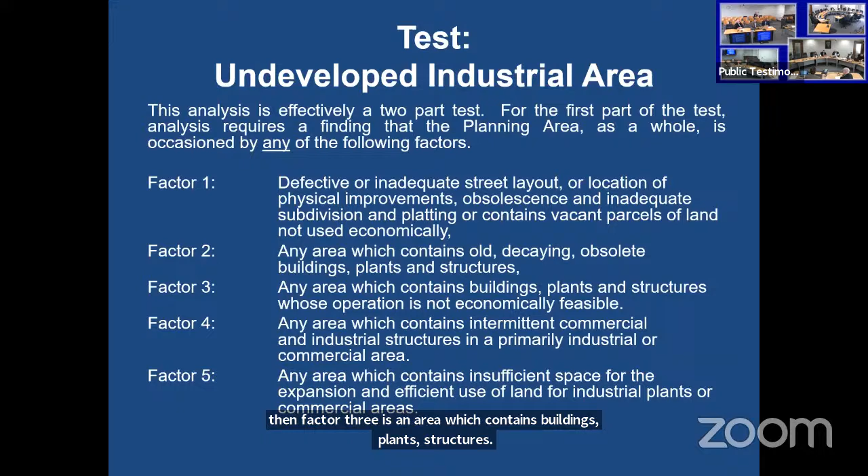Factor 1: defective or inadequate street layout or location of physical improvements, obsolescence, and inadequate subdivision and platting, or contains vacant parcels of land not used economically. Factor 3 is an area which contains buildings, plants, structures whose operation is not economically feasible. That would go to our two-part test, which would trigger one or both of these causations. Causation 1 is retards the economic or social growth, or causation 2 creates an economic waste or social liability. We did note that factors 1 and 3 were present, and those triggered causes 1 and 2.

So just to dive into these a little bit, factor 1 goes back to the subsurface conditions we found, which are, in our opinion, substandard for the proposed improvement on this site. It triggers a lot more costs and planning to develop this project. We have lack of utilities, existing vacancy or underutilization, and the obsolete platting or multiple ownership issue. Those should all be remedied through this project, and again we have the difficulty of construction.

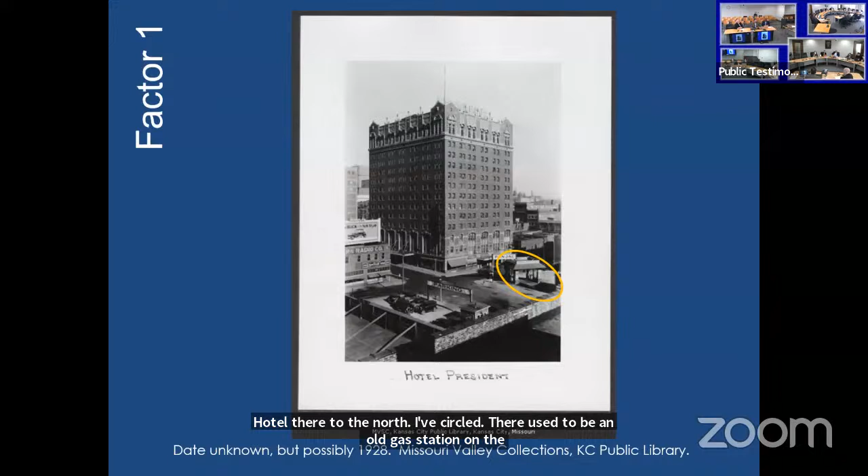So a little history on this site. This picture is from 1928. You can see the President Hotel there to the north. I've circled what used to be an old gas station, at the southeast corner of 14th and Baltimore. You can see this building to the left, it says Radio & Co. That is the site of where the Power and Light building will be constructed.

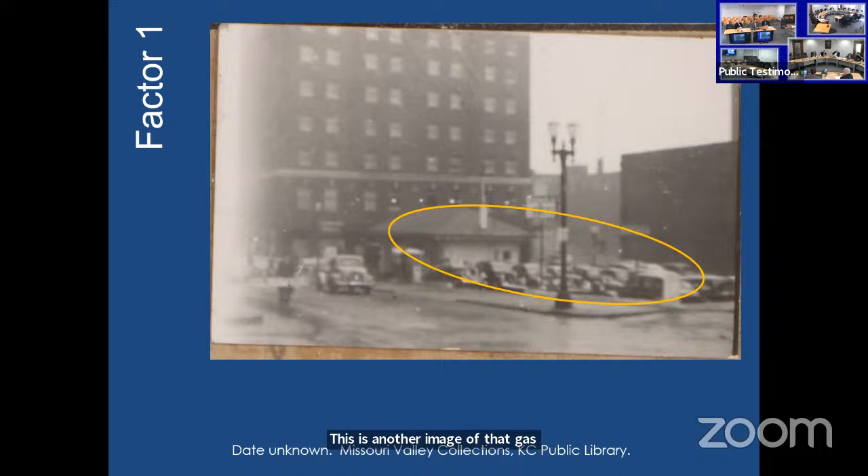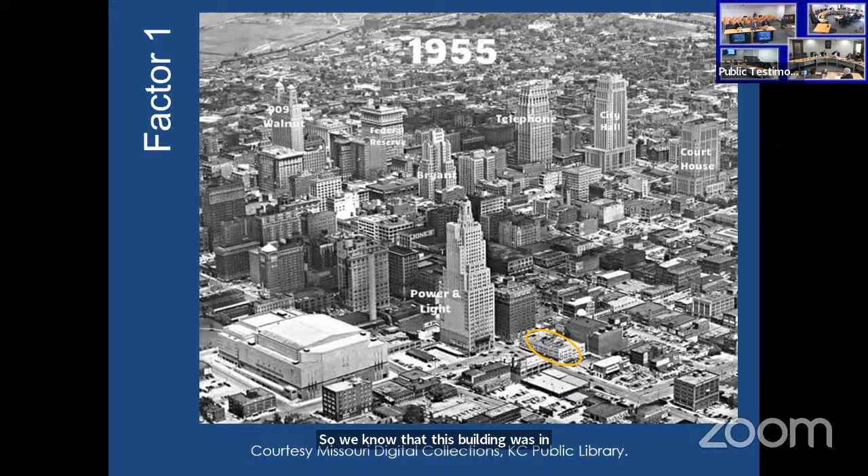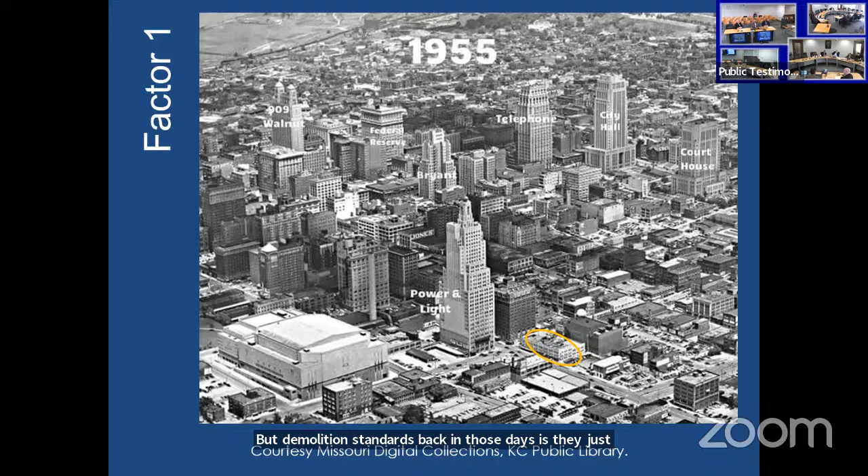Moving to factor 3, again we have the underutilized nature of the site, but this also adds in an issue of crime. We were talking about crime earlier downtown - I think everybody's aware of the prevalence of crime. We are noting about 5 incidents per month within the redevelopment area. We would think that would change with the construction of this project.

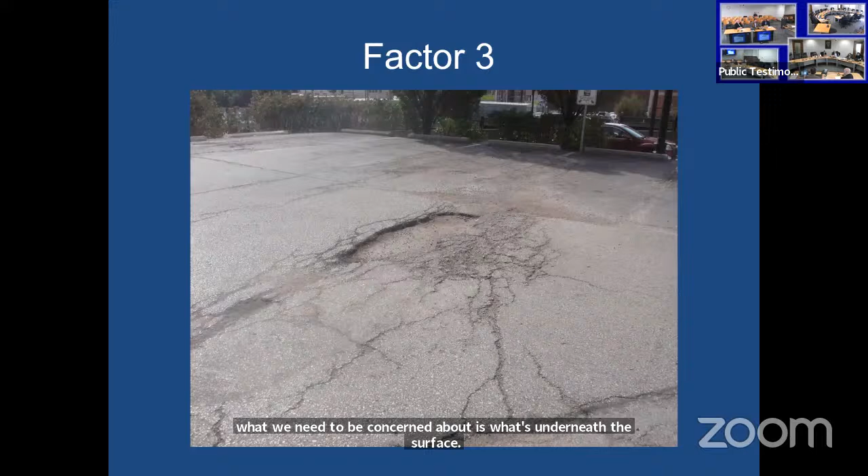Here's some images - it's a surface parking lot. I think we've all driven past this many times, but what we need to be concerned about is what's underneath the surface. The surface parking lot itself is not in great shape - it's adequate, but we did note some graffiti.

And then we're moving to the second part of the test, which is the first cause - retards economic or social growth, or creates an economic waste or social liability. This basically is an economic argument. Presently, the assessed value of that site is $1.4 million per year.

Cordish is proposing building a $156 million project. Obviously the assessed value will go up. We have the impact of 293 potentially new households to the area. We have e-tax that would go along with that, generated through construction employment as well as permanent employment, and as well as new utility taxes.

Same issues on causation 2, but we're also looking at the crime impacts. We anticipate once this block is activated - and I think with any Cordish property in the Power and Light, those are manned 24/7, as will this site be - we would see those crime impacts reduced.

To summarize, we did note that factors 1 and 3 were present, which led to causes 1 and 2. It is our opinion that the site does qualify as an undeveloped industrial area per the state statutes.

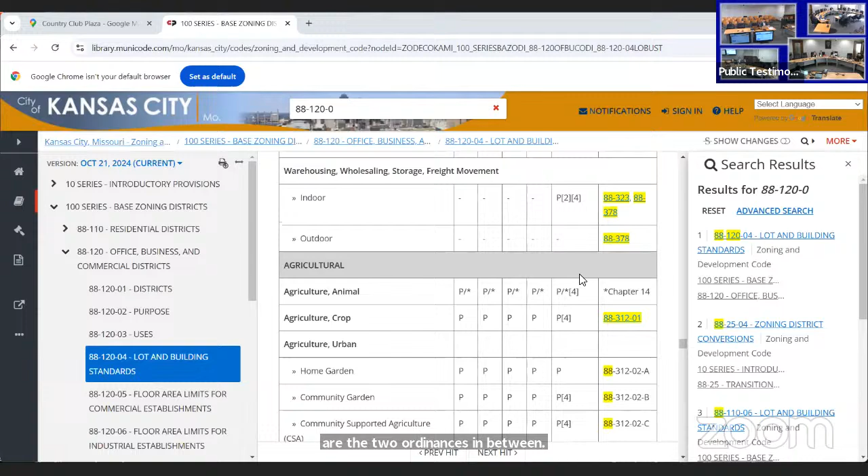So one of them, let's see, would be... okay, so right here we have 88-120-03-H, which is mentioned as the second one in the memo. This has use restrictions, which I think are pretty clearly defined: additional restrictions on uses located within the area known as the Country Club Plaza, which is the area bounded by... and it says what's prohibited.

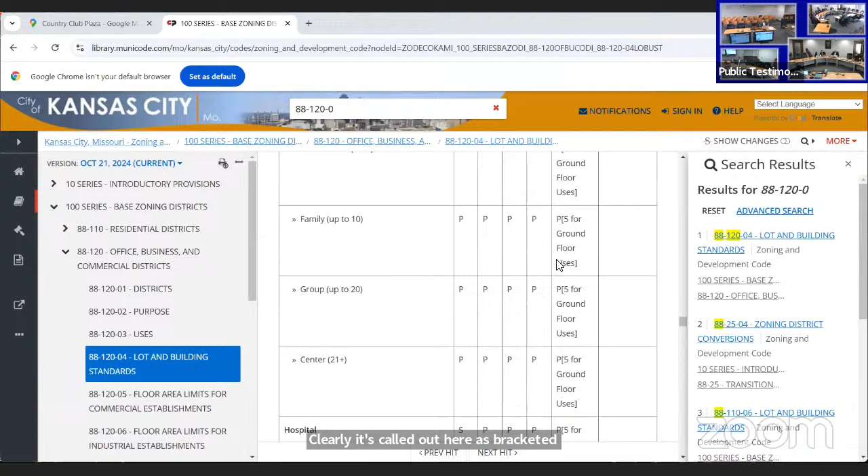I don't know how unique that is to different parts of the city, but clearly it's called out here as bracketed numbers 4 and 5. And so then we see what has a 4 and 5 with all these different types of property uses. So then at the bottom of this table, for lot and building standards...

This map comes up as a footnote for number 5. For buildings located within the Country Club Plaza, building heights shall be limited or allowed to the heights and stories as shown on the Plaza Bowl concept map attached hereto as Exhibit B and incorporated herein by reference. This, I think, is the best case for why, if anyone would say there's a bottom of a bowl, this is kind of it in theory.

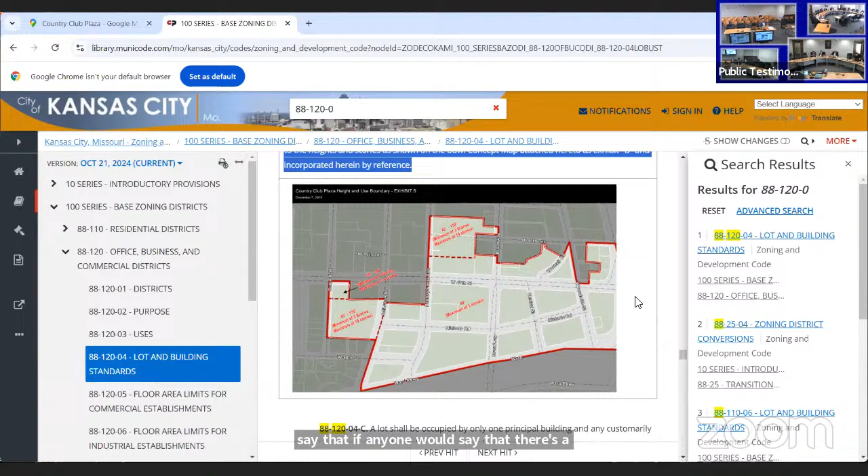Which to me I just think it's lacking, that this exhibit, which is an exhibit to a footnote, which is the only one in the entire city, is limiting heights. So if we go to Google Street View...

Just for the sake of example, oh gosh, sorry, this mouse. Let's see if I can get here. Yeah, you can. Oh, it's 47th, right? Because there's a church, sorry, I'm clicking, it's just taking a minute. So this is just like a fun corner in a couple different ways. So, Kelly Building... oh my gosh, how do I make this a little smaller?

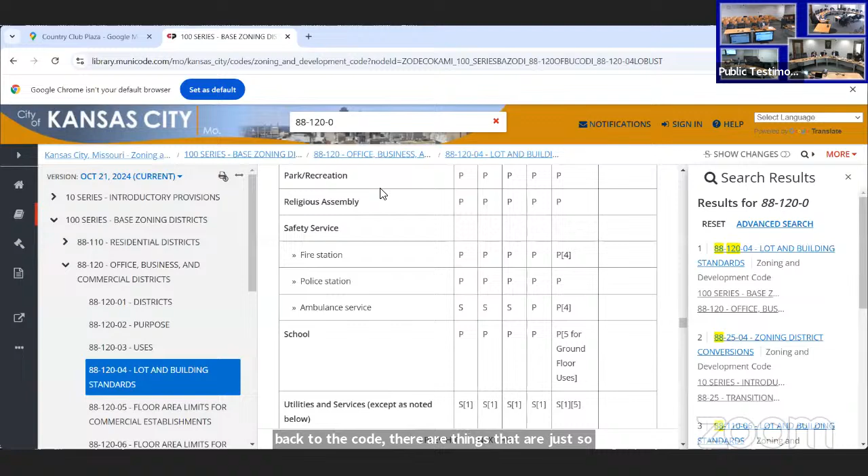Sorry, I thought this was an appropriate time because we were discussing the memo of information, and it's nice to see, so I wanted to clarify the errors that I see in it, and why I think there are certain parts that, if we go back to the code, are so nicely called out in other parts of the code—for example, our use standards. That's something that's easy for us to follow.

Today, the reason I was upset about calling an area blighted, or not industrial, is because we have an obligation to do things we believe are morally, truthfully, in good faith, accurate. I can, in good faith, look at these use standards, written up very clearly as an actual paragraph, and understand the intent as it relates to the table. But when we have a map that's part of a footnote to something else that conflicts multiple times, it's tough to say, yep, this is right. We're going to have to agree to disagree.

Well, the part you might agree with me on about conflicting—if you look at the Unity Temple parcel, some maps pick it up, some maps don't. I think that's just a pure conflict when you have to choose which map. We choose the map that was adopted as part of the ordinance by the city council. There are two ordinances, two maps. So you just take the most recent one? Because the first ordinance didn't have it. That's the issue—yes, because it was not included in the Country Club Plaza definition.

It's included in the Plaza Bowl overlay—two different things. Yeah, two different things. So in the first map it's intentionally omitted, and then in the second map, in a new ordinance, without ever calling it out as being added, it gets picked up. So the map changes without any recognition of the map changing, and it is in conflict with the three-story rule. So it can all be fixed.